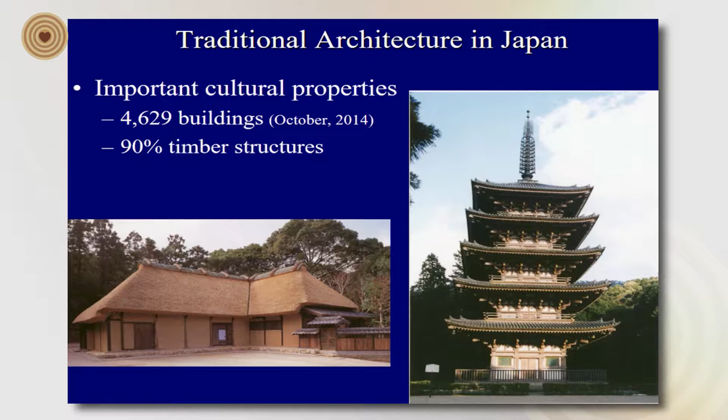The structural characteristics of timber pagodas and timber architecture in Japan is made of timber post and beam construction, usually made with timber, mud, bamboo, and these non-engineered natural materials.

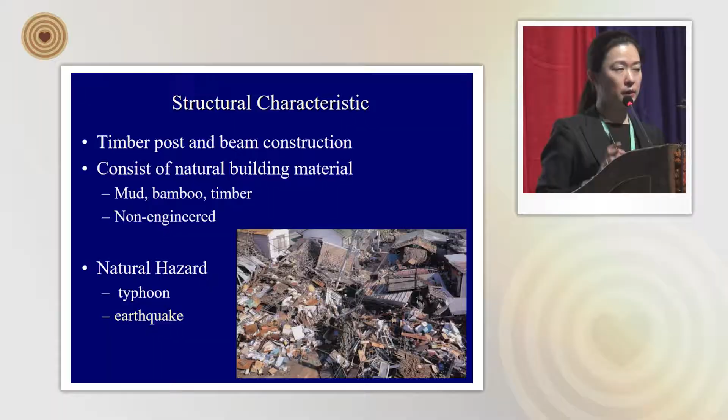As I have referred to, we are facing very strong natural hazards, including typhoons and earthquakes. So in Japan, when we say structural engineering, it is almost nearly equal to seismic engineering - how to protect this architecture from collapsing by earthquake.

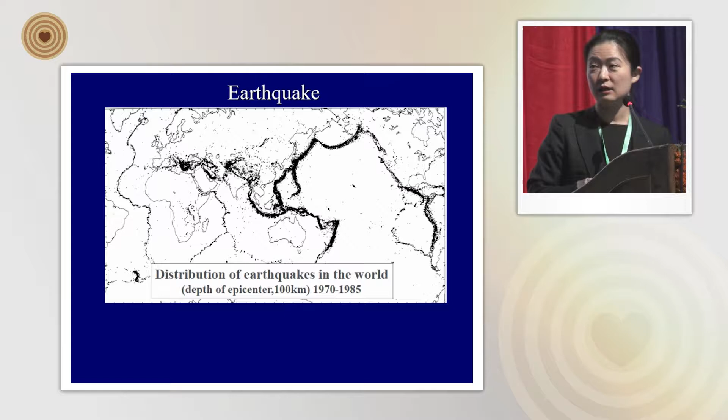Just a little bit of statistics. This is the map of the world, and each dot indicates an earthquake event. You can see many dots, and Nepal is also a seismic country. But Japan is a very small island country, right here - you can't even see our country due to so many dots.

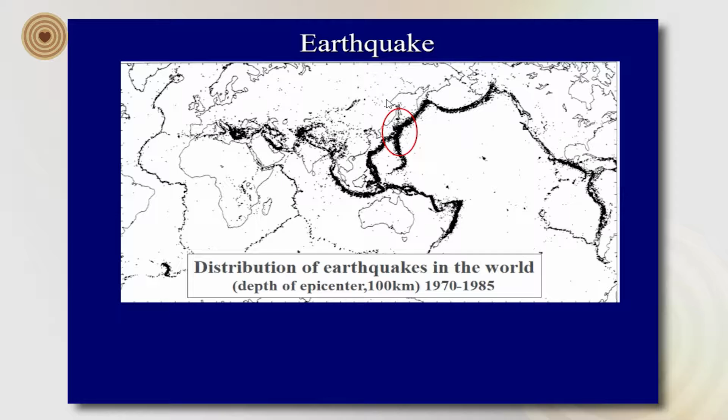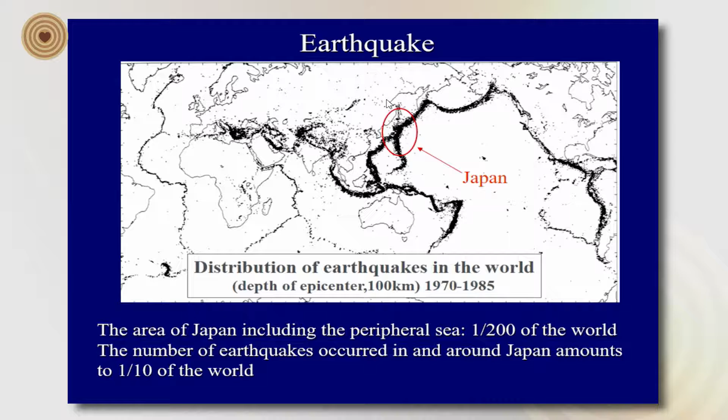The area of Japan is about 1/10... we are a very small island country, about 1/200 of the world's area. But the number of earthquakes which take place is about 1/10 of the world's total. So we have a very high density of earthquakes in Japan. Not only from these numbers, but you can see from the illustrations how seismic-prone a country we are.

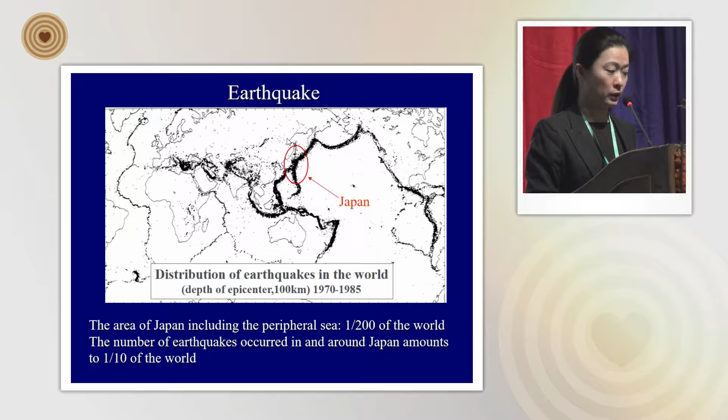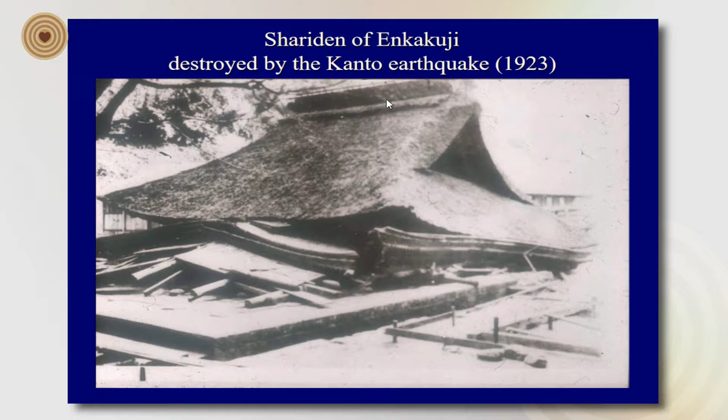This is an old temple built in the 15th century, which was a national treasure. It collapsed entirely in the earthquake of 1923. This kind of damage has been known to occur repetitively - we have had beam buildings that have been damaged repeatedly by earthquake.

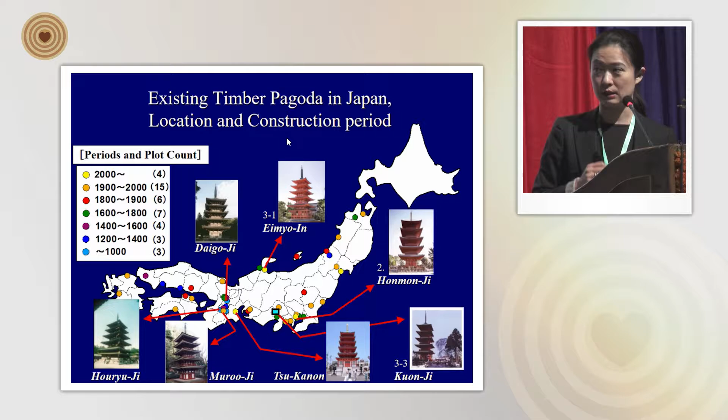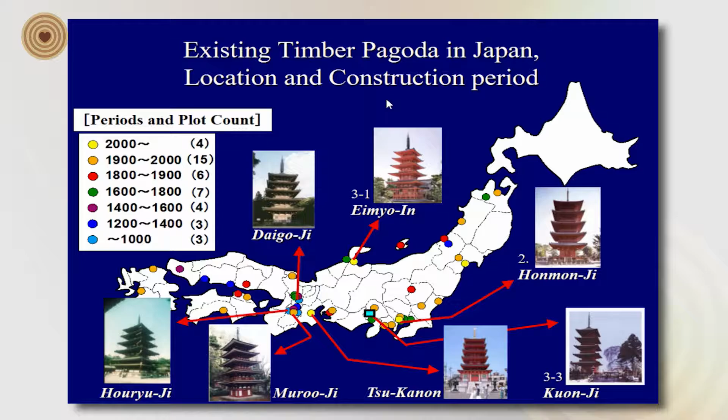Concerning the timber pagodas that we are researching, we have about 22 existing timber pagodas built before 1850. After that, we have been building more, and actually timber pagodas are being built almost annually in Japan. So people like these constructions.

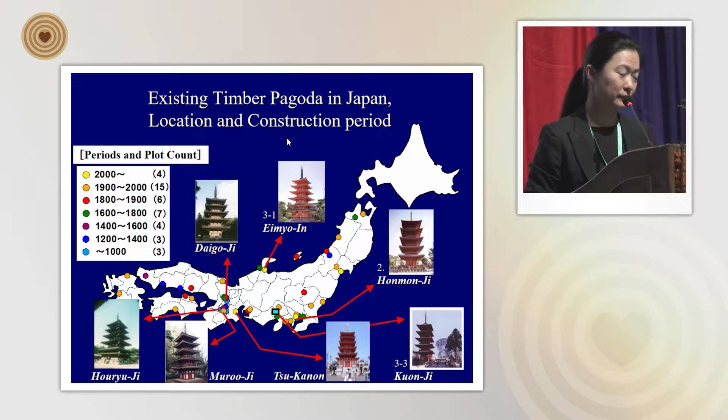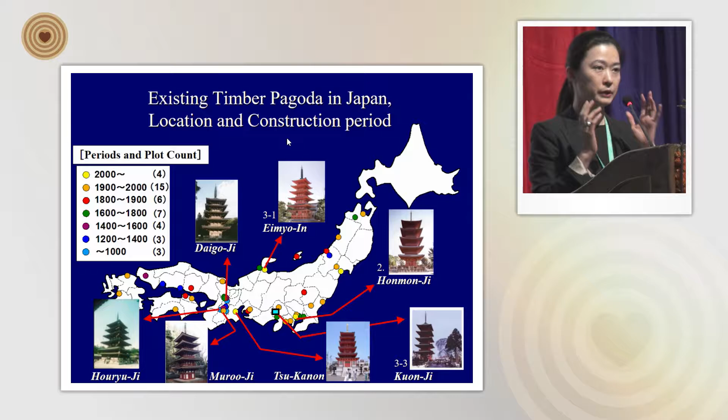But they're very complex, very high, and do not look so strong against earthquakes. Actually, these 5-story timber pagodas - there is no literature of a complete collapse by earthquake. So it has been sort of a mystery why these vulnerable-looking structures are so strong against earthquakes.

Traditional timber pagodas have been built since the 7th century. Many have been lost due to fire and lightning, and two have collapsed by strong wind. But none has been known to have collapsed by earthquake.

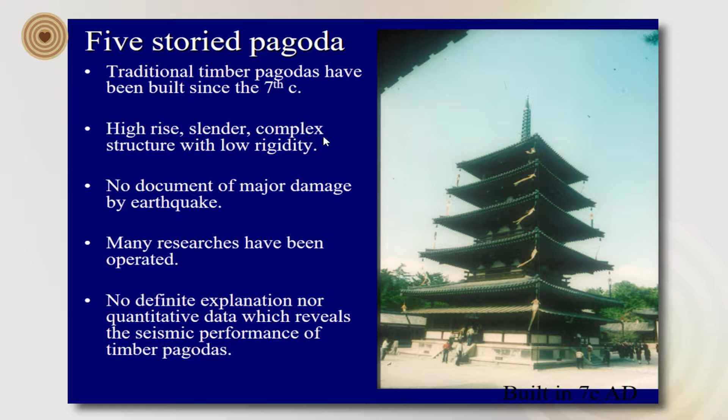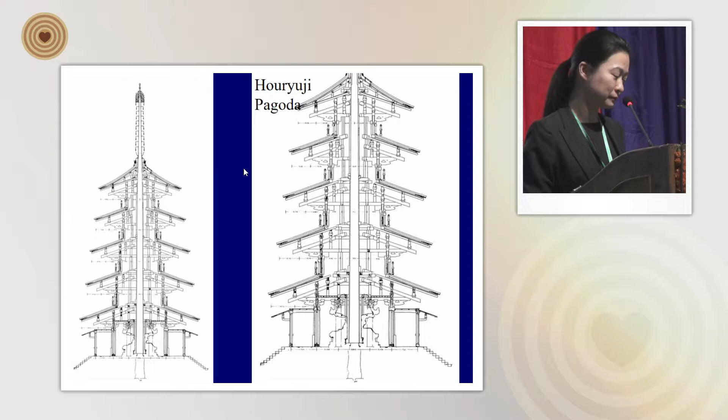So many researchers have been trying to understand why this happened, why they are strong or not. I will just introduce a little bit of the recent research we are doing. Please let me give you a short description of how they are made.

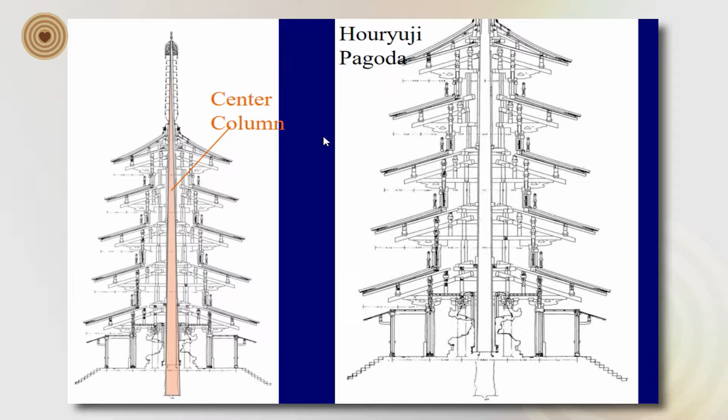You have the center column in the center, and there is a metal ornament on top, which is quite heavy. Then there are the surrounding frames. The most characteristic feature of all is that the center column and the surrounding frame are structurally independent of each other.

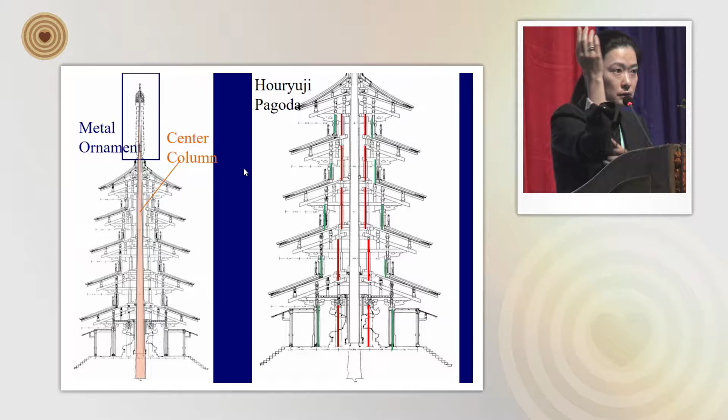So even myself, not so strong - if I go to the center and push the center column, it moves very easily because it is just standing on its own, only connected to the main frame at the top. So the other part is free.

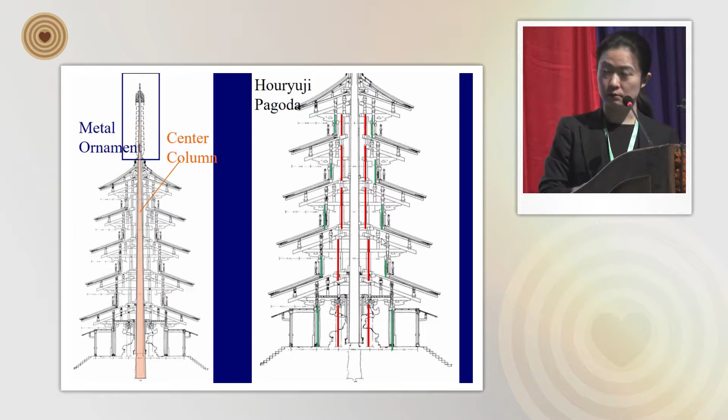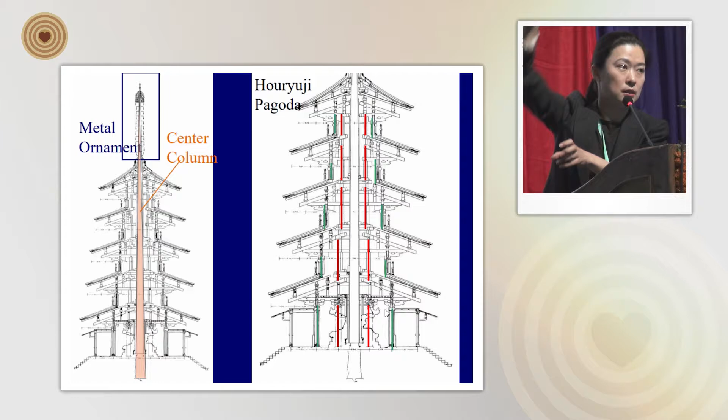Another characteristic is that these surrounding frames are built floor by floor - not one long column in the center, but short surrounding columns at each level. There are what we call brackets, originally from China, used as a complex element to support the long outstretching eaves.

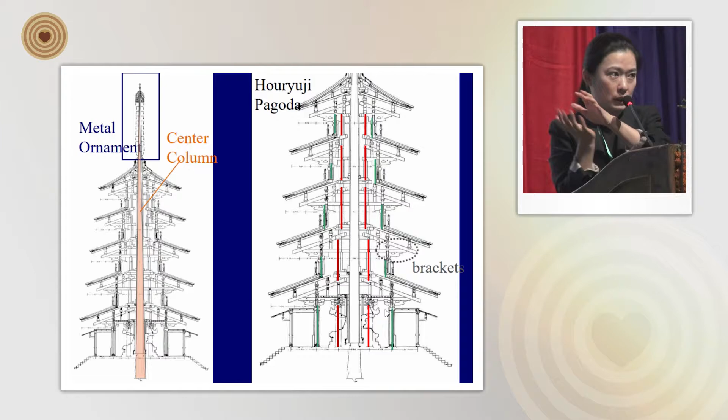In Nepal, they have a very big, large member to support the eave. We use small elements and combine them together to support the eave - a little bit different, but basically the same.

Our research consists of many things - I cannot introduce everything, I'm sorry, it would take two hours. So I will just introduce a little bit, the yellow one, which is the most dynamic.

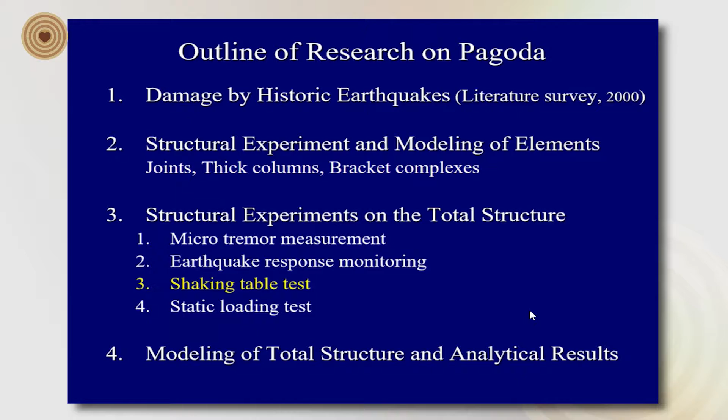The outline is that we first investigated through literature survey whether they have really been damaged or not. The second part is the modeling of each element, like this joint, which is structurally made of column and beam, and the column and beam joint.

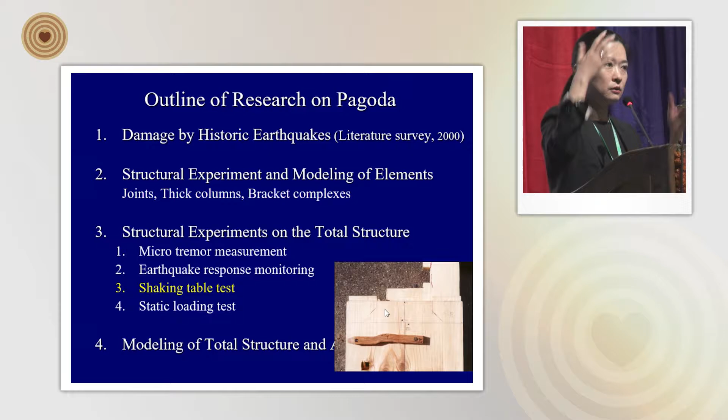The joint is very important concerning structure. There are many different types of joints, and also the brackets that I showed you about, which hold the roof and eave. These elements have been tested dynamically and statically, and by combining these elements, it is analyzed.

But how it actually moves was our main interest, because nobody has actually seen a standing pagoda move under an earthquake. So we wanted to do structural modeling tests, and we did several tests.

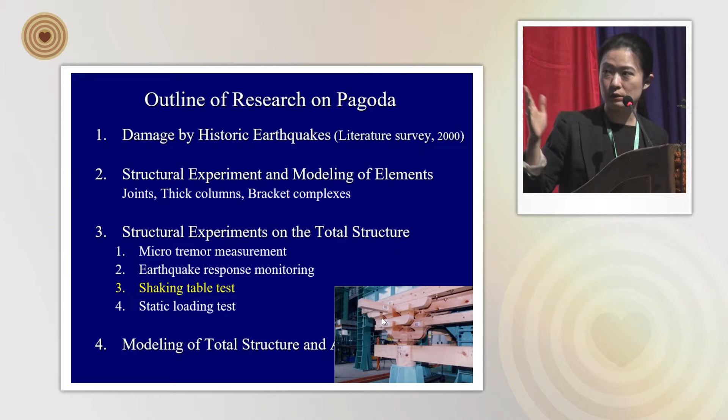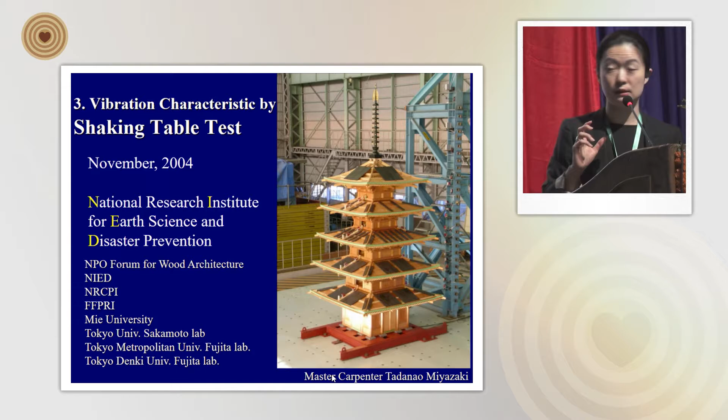It's a very small measurement related to earthquake monitoring, shaking table tests, and statically pulling tests. I will show you images of the shaking table test. We did this in 2004, more than 10 years ago. We made a 1/5 scale model of an existing pagoda, put it on a shaking table. The shaking table is a device which can simulate the movement of an earthquake, and we moved the shaking table.

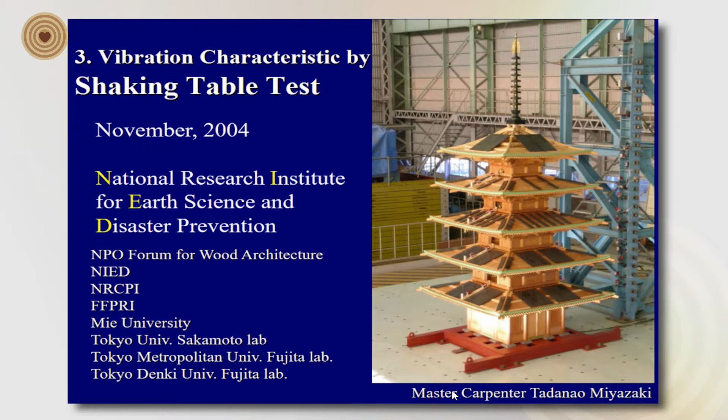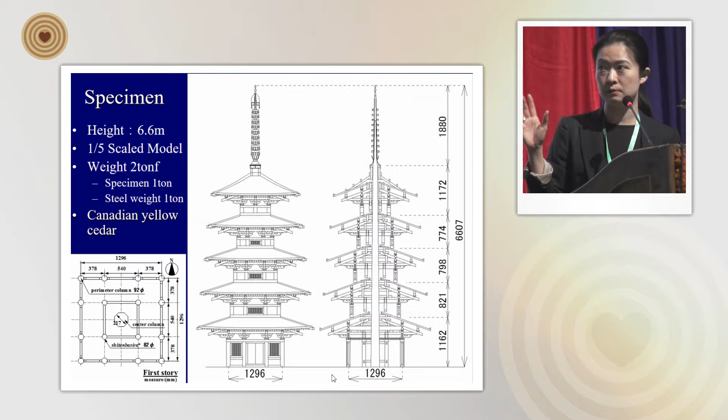It was a very large group funded by many institutions. This is the same section and elevation. It was a 1/5 scale model, but actually the original building is 30 meters tall, so the 1/5 scale model is 6.6 meters, very big actually.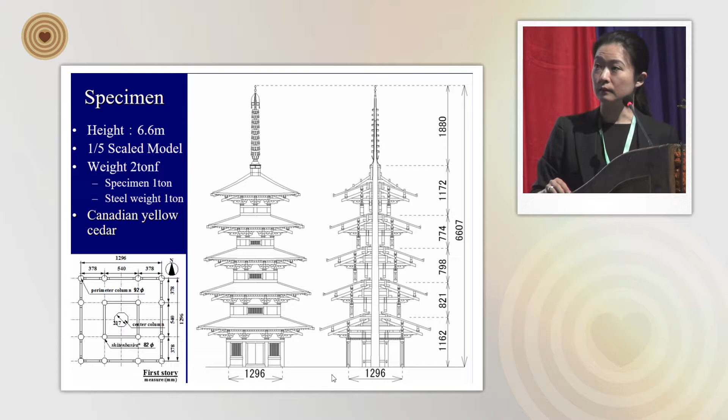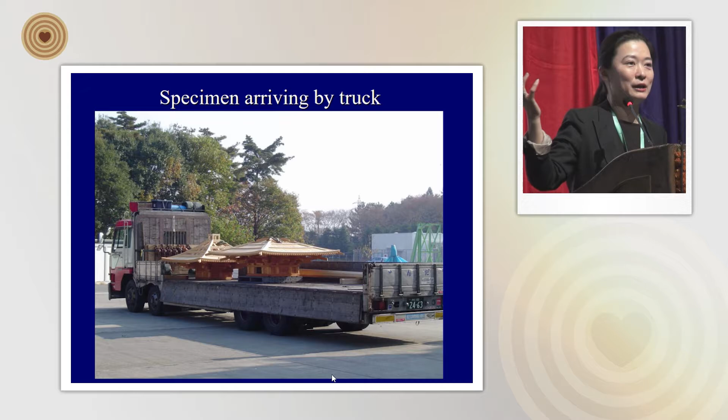The weight we added on top for the clay tile roofing added up to 1 ton. And the specimen arrived - this was not how it was made originally, of course, but at first the craftsmen made it in the factory and they moved it to the experimental laboratory by truck.

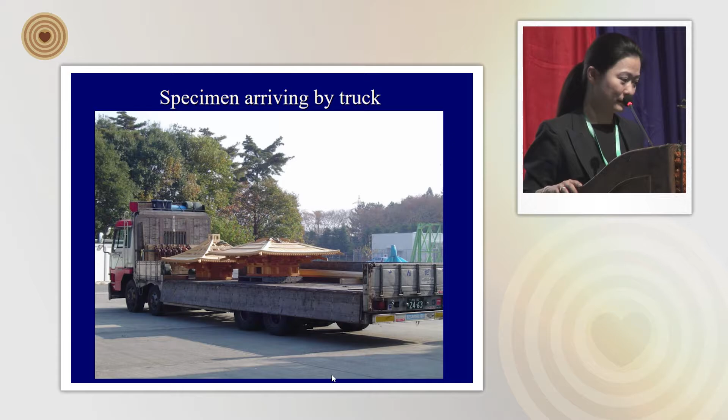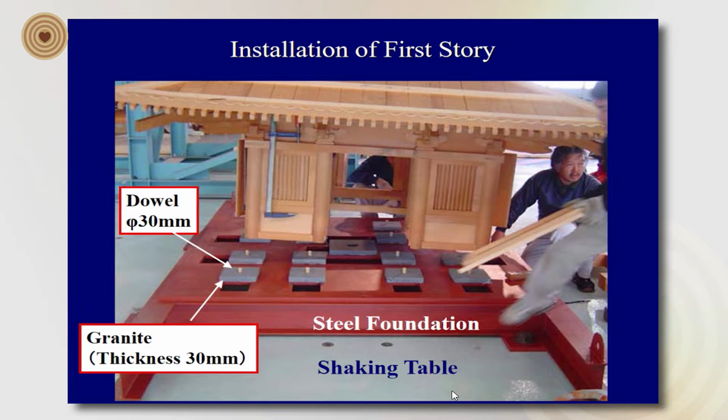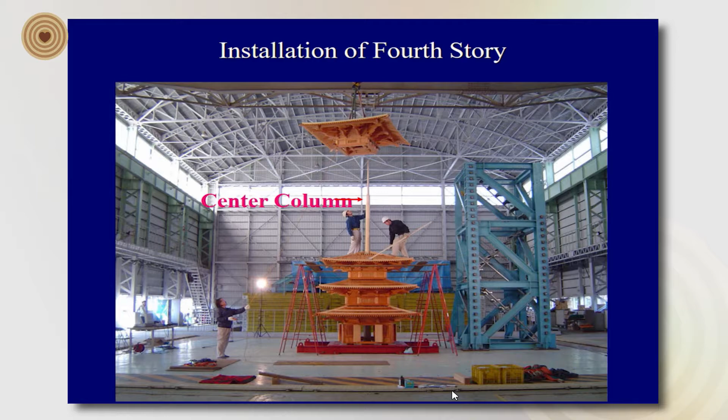And we installed each story one by one. This is the first story, and the right-hand side is the master carpenter who made this building. You can see the center columns in the installation of the 4th story. It's finished at 6.6 meters and 4.6 meters in height.

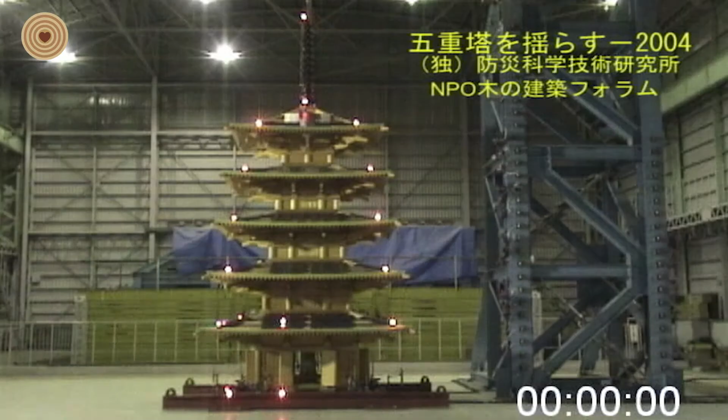I will just show you some images of the experiment. This was the input motion of the Kobe earthquake in 1995. And you could see that it moved in a very curved wave.

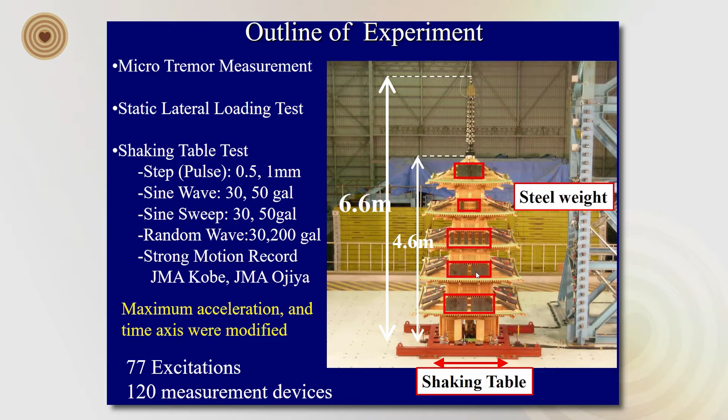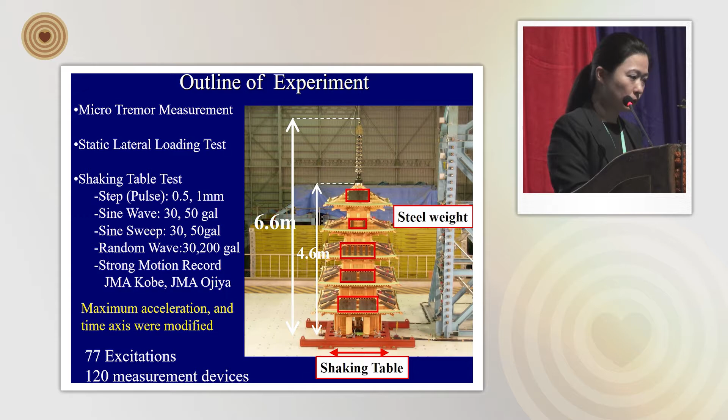So this is the outline of the research that we are trying to do, and we are now trying to simulate the actual performance. But this is not so easy, and we are still testing each of the members and trying to simulate and reproduce the same movement again.

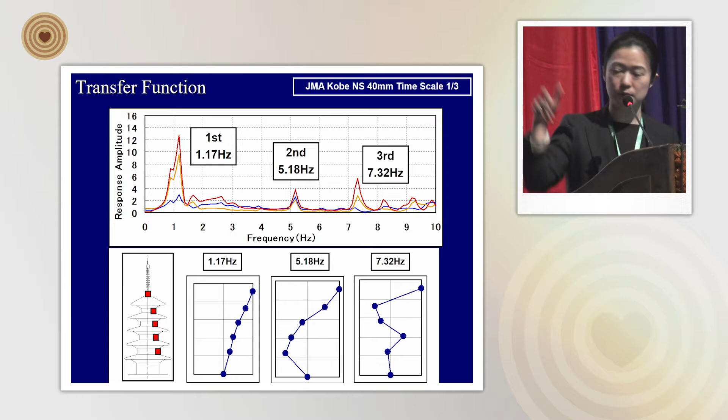And lastly, I would like to talk a little bit about Nepal, as I am in Nepal. There was, as you know, a very large earthquake, the Gorkha earthquake, last year, and we have investigated some pagodas in Nepal also, because we share the same interest with high-rise pagodas in a seismic-prone zone.

So in 2009, we conducted some on-site tests in Nepal, and unfortunately, of two pagodas, one was the Kumbheswor temple, a 5-story pagoda. Unfortunately, this pagoda was damaged on the 5th floor, so it was originally 5 stories.

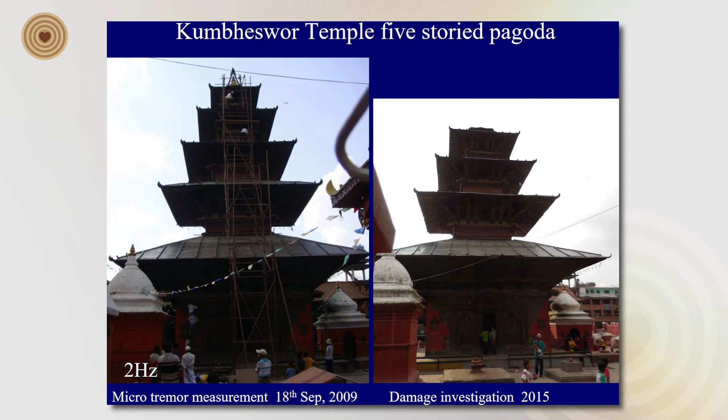The left-hand side picture is the picture taken in 2009. The right-hand side was the picture we took last year after the damage. So the 5th story fell off, unfortunately.

And there is another 3-story pagoda, the Radha Krishna temple in Patan. We also measured this pagoda. Unfortunately, this was totally damaged.

So we are trying to understand why the Japanese pagodas have survived many large-scale earthquakes, but during this earthquake in Nepal, many pagodas suffered very heavy damage. So we are trying to understand the differences and the systems of the Nepalese pagodas together with the Japanese pagodas, in comparison. Okay, so this is all for my presentation.